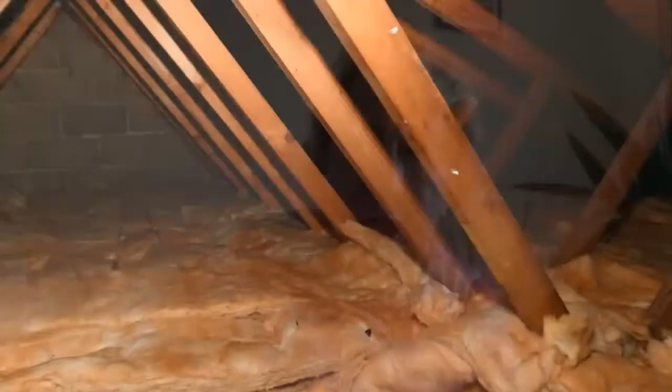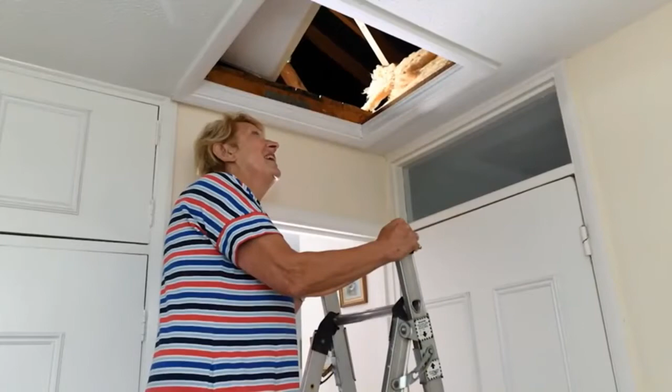I had my loft re-insulated. It had been insulated before, but when the surveyor came round, he found that it was a fire hazard, so the whole loft insulation had to be replaced. No, I don't think I would, because I saw the cost when it came through - it was in the region of £1,000, which is an awful lot of money. So I certainly wouldn't have had it done without the scheme, no. Oh yes, for a start, it costs absolutely nothing. You're helping the green effort by Essex County Council and the government, but yes, I recommend it highly. Yes, it doesn't cost you any time or trouble or money, and we know what could be better.

There we go. So yeah, who can say it better than Elizabeth? Great advocate for the scheme.

Another project we've been delivering over a few years now is Solar Together Essex. This is around how do we drive more renewable energy generation capacity within the county, supporting residents to get access to solar panels on their roofs, to drive down their energy costs and also drive down the cost of those solar panels, through a group purchasing scheme - by having more people sign up, they can drive a harder bargain with the supplier and get a better deal for the actual cost of the installation.

The next scheme is going to be launched 23rd of January, so keep your eyes peeled for that if you're interested. Previously it's reduced costs by an average of a third, and we've installed 770 solar panel installations in 2019 and 2021, and another 600 have been delivered in 2022 currently. That's over 1,300 tonnes of carbon saved by the installation. So another great scheme which Essex is delivering.

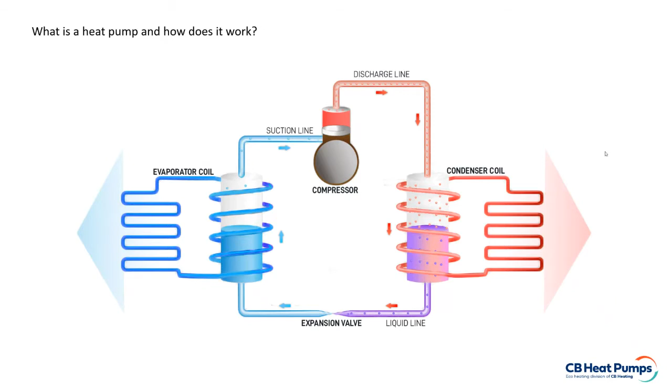So where have we seen this before? And the simple answer is we have seen it in a fridge. Heat pumps are not new. In fact, they've been around for over 100 years. Refrigeration, as we're familiar with it in our fridges, is over 100 years old. It's the same basic technology.

With a fridge, it's extracting the heat from the inside of the fridge and just getting rid of it at the back there. So it's that same thing. It's absorbing the heat from the air outside and utilizing that red section there to actually heat your home.

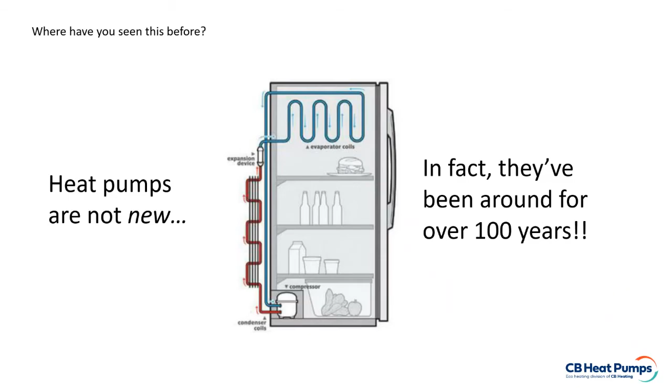That said, there are many different types of heat pumps, many different uses, different applications, different types of properties and such like. And of course, they come in all different shapes and sizes, as we can see from this slide here.

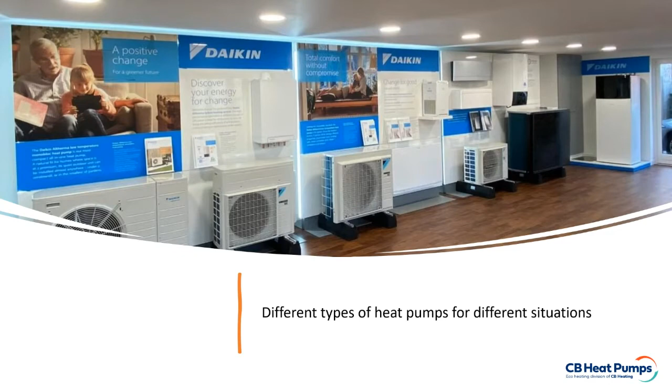Now, interestingly, not every house is suitable for a heat pump, and this is perhaps what we may have heard in the news or in general chit chat. It's all down to the heat loss of the building itself.

If the heat loss is too great, then a heat pump isn't necessarily the right solution. Some houses can be further insulated, as we can see from this graphic. The house on the left is nicely well insulated, all blue on this thermal imaging. The house on the right, for all intents and purposes an identical property, has considerably greater heat loss. This is where sometimes we're asked, if the heat pump my neighbour's got is going to work for me? Well, we really don't know until we've carried out in-depth heat loss calculations, and from there we might advise that a property is further insulated or that other measures are applied.

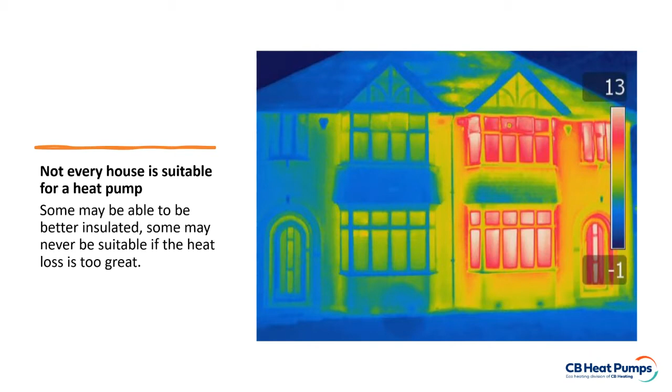The cost of running a heat pump compared to a gas boiler - this is obviously something people ask very often.

Interestingly, even before energy prices went crazy, still around 75% of heat pumps actually went into homes that were replacing a gas boiler. What that means is that people were doing this even when there was no saving on energy bills. The motivation isn't always about saving money, it's about saving the environment, or it may be a longer term view, because there is an upfront cost for homeowners which will take a fair amount of time to recover. But if you have that long term view, it's something that certainly makes sense.

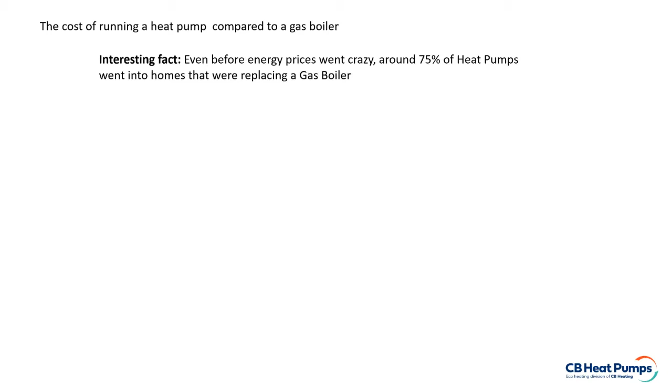Now, as we all know, the cost of fuel has since gone quite crazy. The average unit price for dual fuel customers paying by direct debit will be limited to 34 pence for electricity and 10 pence for gas. This is certainly very important - we'll come on to why in a moment.

Now, the average heat pump COP. What is COP? It's a coefficient of performance. What this really means is that to get 3 kilowatts of heat out of a heat pump, you need to put 1 kilowatt of electricity in. So it's that 3-to-1 ratio - 1 kilowatt electricity in, 3 kilowatts of heat out with a heat pump.

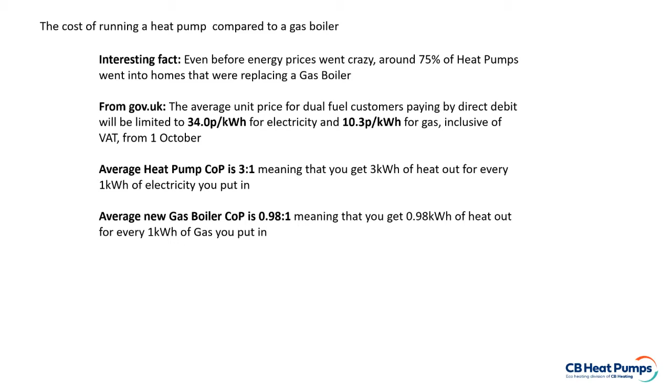If you compare that to an average new gas boiler, running at say 98% efficiency, that gives you a 0.98 to 1 coefficient of performance - meaning you get 0.98 kilowatt hours of heat out for every 1 kilowatt hour of gas you put in. Compare that to an older gas boiler, it's more like 80%, so you're looking at 0.8 kilowatts of heat out for every 1 kilowatt of gas. Hopefully that's making sense to everyone.

Therefore, the cost of 1 kilowatt of heat from a heat pump using electricity with a 3-to-1 coefficient of performance is around 11.3 pence. Compare that to a new gas boiler, where the cost of 1 kilowatt of heat is around 10.5 pence, and with an older gas boiler maybe 12.9 pence. So what we're seeing is that the cost of heating your house with a heat pump is certainly comparable to a gas boiler now, as a result of the differences in energy prices.

This all assumes these gas boilers have actually been set up correctly. They may well be 98% efficient out of the box, but that doesn't necessarily mean it's 98% efficient in situ, and how the system's working in the house. So there are certainly many situations today where a heat pump will cost significantly less than a gas boiler, and that's a really important change, largely due to the difference in energy prices.

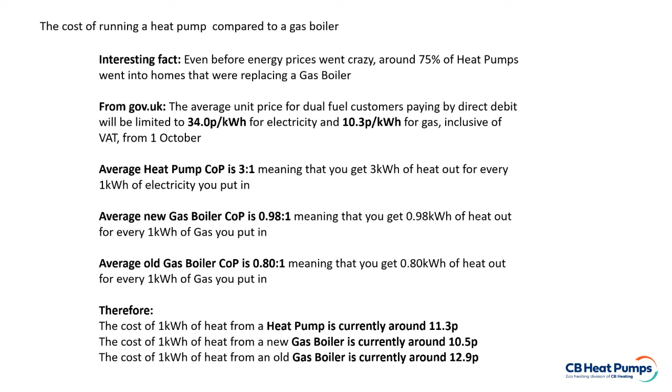So other than the cost of energy right now, why is now the right time to get a heat pump? Well, for homeowners there is a £5,000 grant available. This is directly off the upfront price, so it's an immediate reduction of £5,000. The grant itself is paid to the heat pump company, and that's how it reduces that upfront payment.

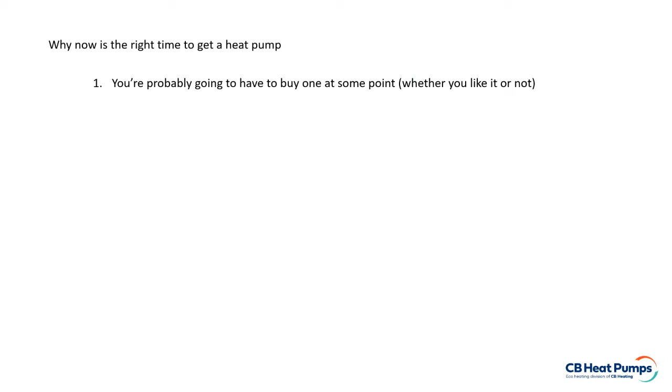Additionally, the reason why right now is the right time to get a heat pump is largely due to the fact that you're probably going to have to buy one at some point anyway, whether you like it or not. That's due to legislation coming into force where, for example, on new build properties from 2025, they can no longer have a gas boiler installed. So alternative solutions will be needed at that point on new build properties. For the vast majority of cases, a heat pump will be the obvious choice, and quite often the best solution for them due to the 3-to-1 ratio.

Due to the legislative focus on the electrification of domestic heating, it's likely that carbon tax will be removed from the cost of electricity and added to the cost of gas. We're all paying various forms of green tax on our energy, but the focus is moving to using electricity for heating.

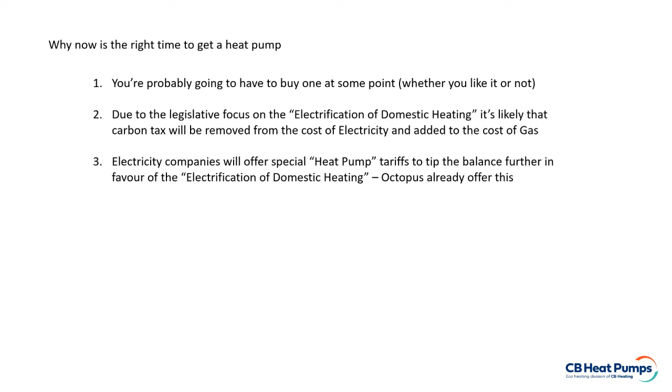As a result, electricity companies will offer special heat pump tariffs to tip the balance further in favour of the electrification of heat. Octopus Energy already do this. We've also seen special tariffs for electric cars - it's much the same thing. It's all about this electrification in the future.

Regardless of that, given we're going to have to do it at some point with the focus on electrification of heat, some people may still feel they'd rather wait and see what energy prices do, then perhaps in 3 or 5 years buy a heat pump. The problem is that £5,000 grant will no longer be there. It's only running for 3 years, starting this April, so we've got the best part of 2.5 years left. If you wait beyond that period, the grant will no longer exist.

If you think about it from the point of view of the grant, it's there to incentivise early adopters. When energy prices change again in the future and a heat pump is so much cheaper to run than gas, there's no need for them to offer that grant. That grant currently covers around 25 to 35% of the cost, so certainly that's a reason to do it now.

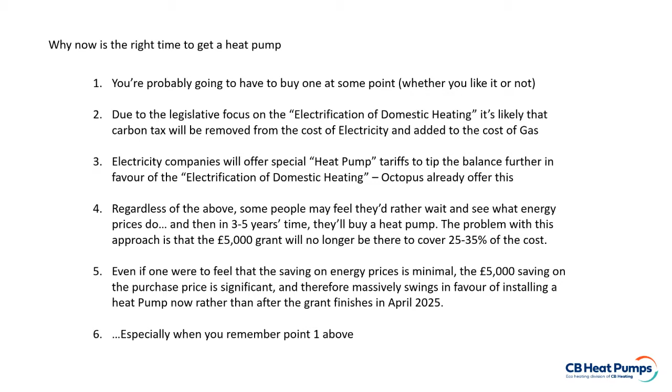Even if one were to feel the saving on energy prices right now is minimal, the £5,000 saving on the purchase price is significant, and that massively swings in favour of installing a heat pump now rather than after the grant finishes. So even if you're not really saving over the next few years, if you then decide to have one in 3 to 5 years' time, it's simply going to cost more money. It makes more sense to do it now, particularly remembering you're more likely to have one of these at some point - so get one when it costs £5,000 less.

There are various myths around heat pumps. Probably the classic example is they don't work in the winter. Bear in mind this is air being blown across a chilled element, and that chilled element extracts heat from the air.

Many people fail to realise the actual refrigerant is circulating at minus 28 degrees C. It only requires a 2-degree differential in heat, so it will still be able to extract heat from the air when the air is at minus 26 degrees C. We simply don't get those kinds of temperatures in this country.

However, if we look at heat pump sales per household in 2021, it's really interesting to see the countries at the top of that list - Norway, Finland, Estonia, Lithuania, Denmark and Sweden. They all have considerably colder winters than our own. The difference in systems installed in those countries compared to the UK, right at the bottom, would suggest it has absolutely nothing to do with the weather and how cold a winter may or may not be.

The truth is these Scandinavian countries had similar grant schemes to what we have today all the way back in 1995. Again, remember from the beginning, heat pumps aren't new - they've been around for 100 years. So you could argue it's really down to education, people being aware of these things, and therefore taking up the installation of them. They certainly do work in the winter, and people need to be aware of that.

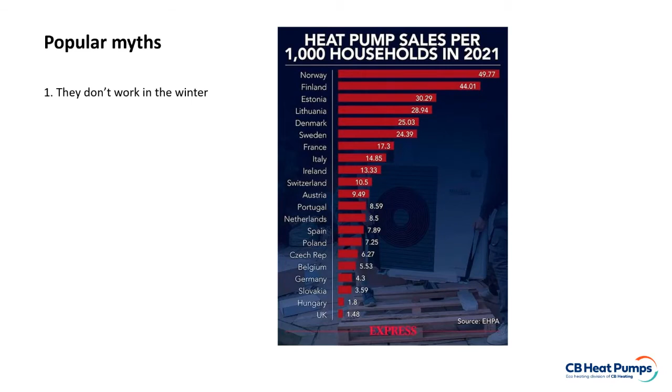The next myth is that they're too noisy. The truth is an awful lot of people have never even seen one, so it's all hearsay on that basis. But how loud is an air source heat pump?

The legal limit is 42 decibels, which doesn't necessarily mean a lot to many people. As a comparison, a laptop - many of you may be watching this on your laptop right now - apparently makes 40 decibels. A heat pump is 42 decibels. So if you're happy with that laptop on your lap at 40 decibels, you'd be happy with a heat pump outside your house at 42 decibels.

Your fridge is around 42 decibels. What I find the best example for really getting an idea of sound and noise is a dishwasher at 65 decibels, and we're all quite happy having one of those in the kitchen. That's louder than an air source heat pump outside. A vacuum cleaner and hairdryer are significantly louder, but the comparison of your own fridge and dishwasher being louder or the same as a heat pump is a really good indication that these are certainly not noisy things.

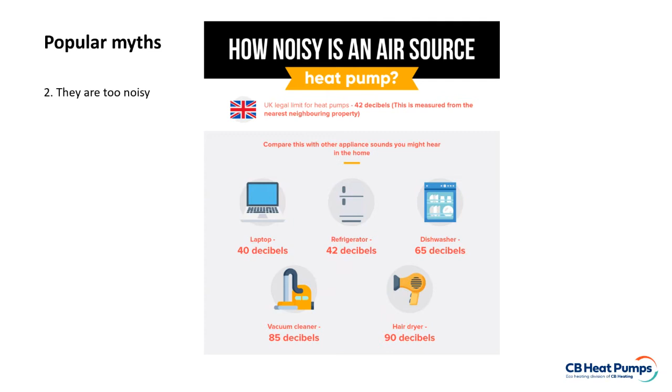Finally, the popular myth that you have to change all of your radiators. Again, high temperature heat pumps - the one we looked at earlier - can produce flow temperatures of up to 70 degrees C. Now, interestingly, you wouldn't set up a heat pump to run as hot as that. You don't need to. But the point is that they're capable of doing that.

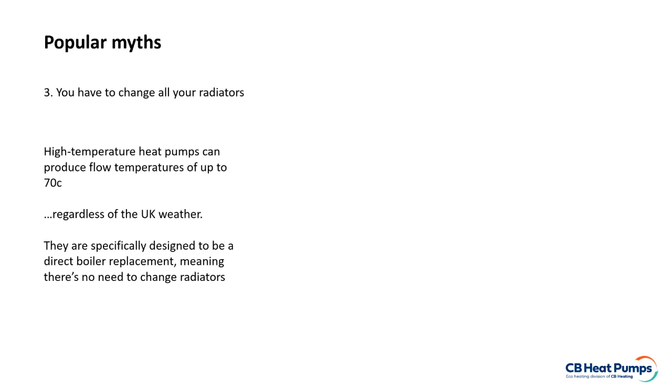And that's regardless of the UK weather. They are specifically designed to be a direct boiler replacement, meaning there's no need to change those radiators. So yes, there is one there outside that house, and yes, they do work all the way down to the minus temperatures we find in this country, very comfortably.

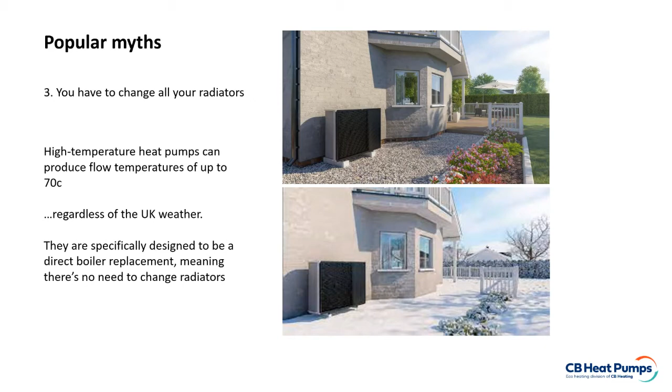So those are the myths dealt with really, and it's largely about this: if people don't know the truth about these things, then those myths will be believed.

So in summary, heat pumps are the future of heating. The energy companies know this, hence why the likes of EDF have invested in ourselves. Octopus Energy is also very strong on heat pumps. E.ON - you may have seen advertising on TV recently regarding heat pumps. So the energy companies know that they are the future of heating.

People in countries with the same or worse winters than ourselves, as we saw in the graph a moment ago, they know this. And so perhaps now you too know this as well: heat pumps are the future of heating. On that note, we are very happy to answer any questions you may have. Hopefully that was interesting and useful to you.

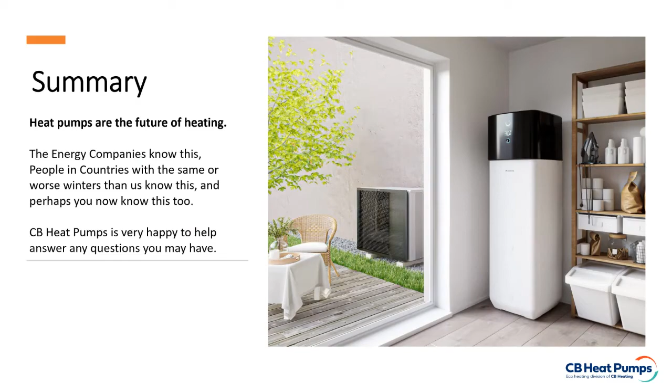So for you, Dan, there's two questions about heat pumps. How much is a typical heat pump for a home? As we said earlier, they will vary, largely due to the heat loss of the building and also the size of the building. But as a range, anywhere between £13,000 and £17,000 is a good sort of estimate. And for homeowners, of course, there is that £5,000 grant that comes directly off of that.

Once again, it does depend on the extent of the work. You should always start from a fabric first approach - in other words, it may well require additional insulation, and that would need to be factored in. On occasions, radiators do need to be changed. Hot water cylinders may need to be changed too, so that may need to be factored in as well.

And then the other question: is there a comparison of heat pumps versus electricity, not gas - I am on storage heaters. Yeah, that's actually a nice, easy comparison because obviously they're both using the same fuel, both using electricity. So we're back to the coefficient of performance. With a heat pump, the heat it uses to warm your house isn't generated by electricity - it's harvested from the air outside. The electricity is purely used to power the machine. Whereas with a storage heater or electric radiator, the electricity is what's producing the heat. So on that basis, you can only ever get a maximum of 100% efficiency, which may sound great.